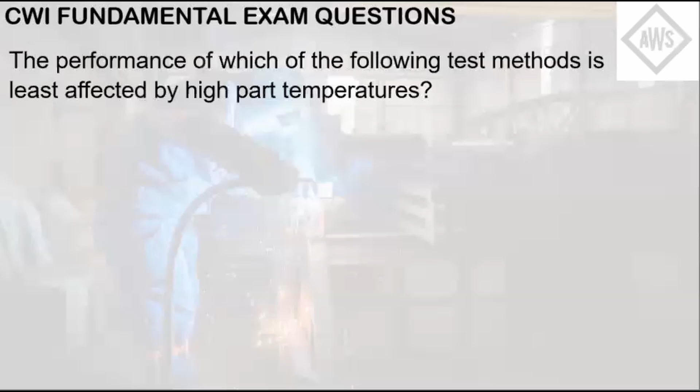The performance of which of the following test methods is least affected by high part temperature? So this question pertains to what testing method is least affected by high part temperature. So basically, after the weld, you can expect that the base metals and the welded metal are subjected to a high temperature. So what testing method is least affected by it? So letter A, ET, letter B, RT, letter C, PT, letter D, UT, letter E, VT.

So ET stands for eddy current testing and does not need the probe to touch the metallic specimen. So ET is done by a coil carrying AC and works by electromagnetic induction. So because of this, hot parts are facilitated and allowed. But the limitation of this testing is that highly skilled operators are required to operate and interpret the results. So ET is not affected by the high part temperatures of the weld and the base metal.

So for the other choices here, high part temperatures can affect the result in RT, especially PT and UT because of the need for contact of the couplant to the base metal or the welded part of the metal.

You need to basically have the base metal cool off a bit for safety purposes as well, and of course for visual inspection. So you need to have the metals cool off a bit. So the answer here is letter A. Since eddy current testing doesn't need contact to the base metal or the metallic specimen, this is the test method that is least affected by those high temperatures of the base metals.

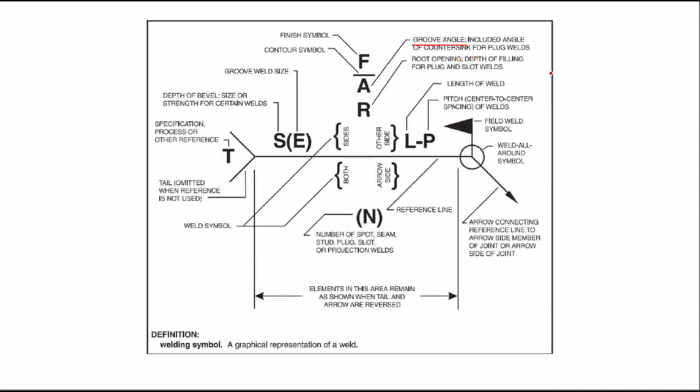The question can be best demonstrated with this illustration. As you can see here, the groove angle is specified at the top of the weld symbol. This is the weld symbol at the center. So this is the groove angle. As you can see here, the tail is used for specifying processes or other references. So it can basically specify drawing references, what welding process it is, among others.

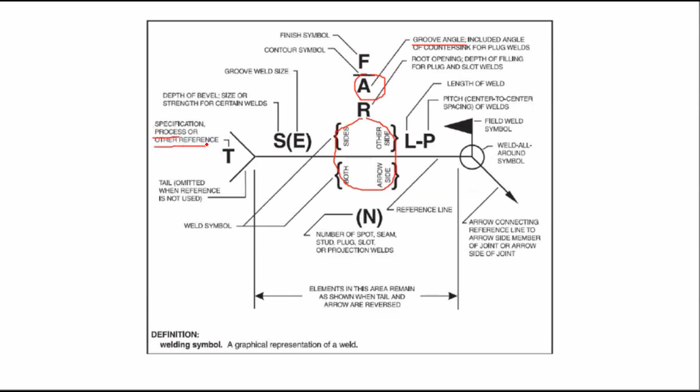Especially indicated here, welding process requirements, you can indicate that in detail, even welding procedure requirements, or electrode requirements, and welding specification requirements. This can be indicated in the tail. But the groove angle has a specified location in the welding symbol. So the answer here is letter E. So denoting groove angle is not a function of the tail of a welding symbol.

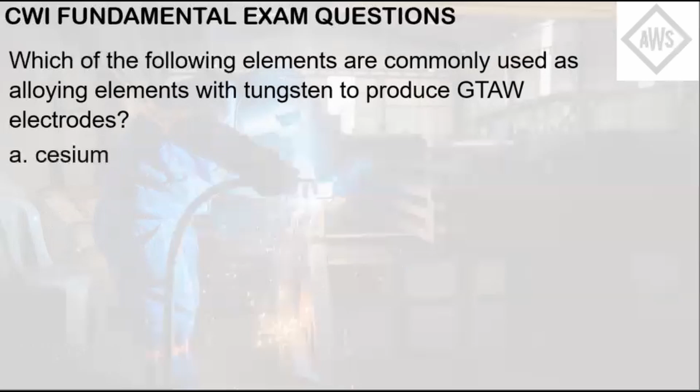Which of the following elements are commonly used as alloying elements with tungsten to produce GTAW electrodes? Letter A, cesium. Letter B, thorium. Letter C, columbium. Letter D, vanadium. Letter E, chromium. So thorium aids in improving the electrical characteristics by making the tungsten electrode more emissive. So basically, it makes it easier to initiate an arc for TIG welding.

So it is most commonly used for joining ferrous metals, hence why it is a common alloying element with tungsten. If I'm not mistaken, thorium is added, I think, 1 to 2% with tungsten to have this effect. So the answer here is letter B, thorium. This is the most common alloying element in producing TIG electrodes.

For single bevel groove weld symbols, the line of the weld symbol running perpendicular to the reference line is always drawn on which side of the weld symbol? Letter A, on the right. Letter B, on the left. Letter C, on either side depending on company policy. Letter D, on the side in which the straight side actually appears in the joint. Letter E, doesn't matter.

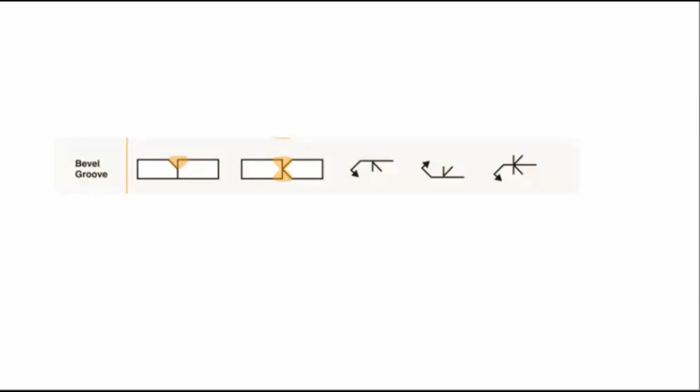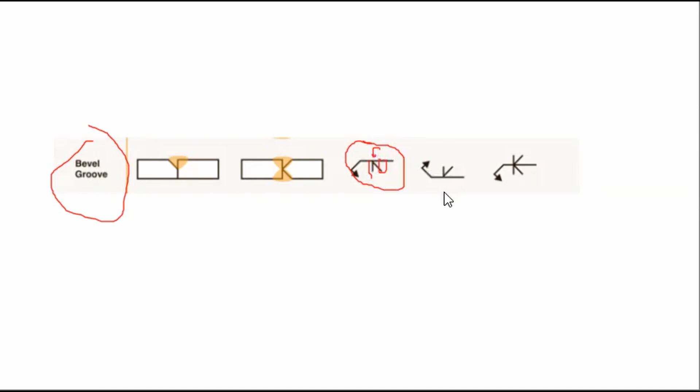So this question can be best demonstrated by this illustration. This is a single bevel groove weld symbol right here. The line perpendicular to the reference line is this part right here, the straight line coming through the reference line perpendicular to it. So it is always left of the welding symbol, right? It's always on the left part of the weld symbol. So the answer here is letter B. It's always on the left side of the weld symbol.

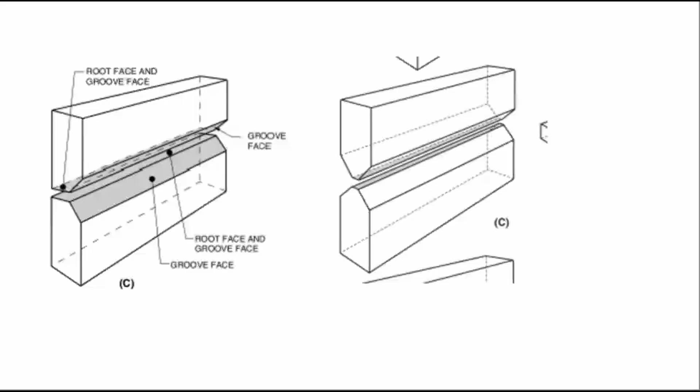So the portion of the groove face within the joint root is called: letter A, weld interface, letter B, faying surface, letter C, groove weld edge, letter D, root face, letter E, groove angle. So the joint root here is the shaded part of this figure right here. This is the root face right here, and the groove face. This entire shaded portion is the joint root.

So basically, the portion of the groove face within the joint root is the root face, letter D. As you can see here, this is the entire groove face, and this part here is the root face and the groove face. Basically, they are on the same joint root. The groove face is the face wherein the groove angle is located.

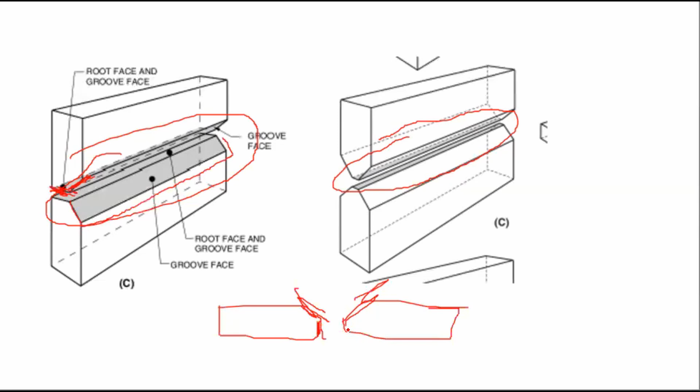So basically, this is the part of the groove face, this part right here. So the entire part of this one is the root face and the groove face. This is the part of the root face, basically. So the answer there is letter D, root face.

Piezoelectricity is a material property used by which NDE method? Letter A, UT, letter B, ET, letter C, RT, letter D, MT, letter E, PT. So piezoelectricity is used in UT, wherein the transducer is attached to an electric base unit. The machine then produces pulses through a coaxial cable that is in contact with the test object through the use of a couplant, right?

For letter B, eddy current does not make use of contact with the metal, unlike UT with couplant. Hence, it doesn't make use of the concept of piezoelectricity. RT uses radiographic waves. MT uses a magnetic field with ferromagnetic material, so you cannot use MT for stainless steels without the presence of iron. For ferrous stainless steels, you can use it. PT uses the concept of capillary action, which makes use of the developer liquid rising through the crevices of the discontinuity or defect. So the answer here is letter A, UT.